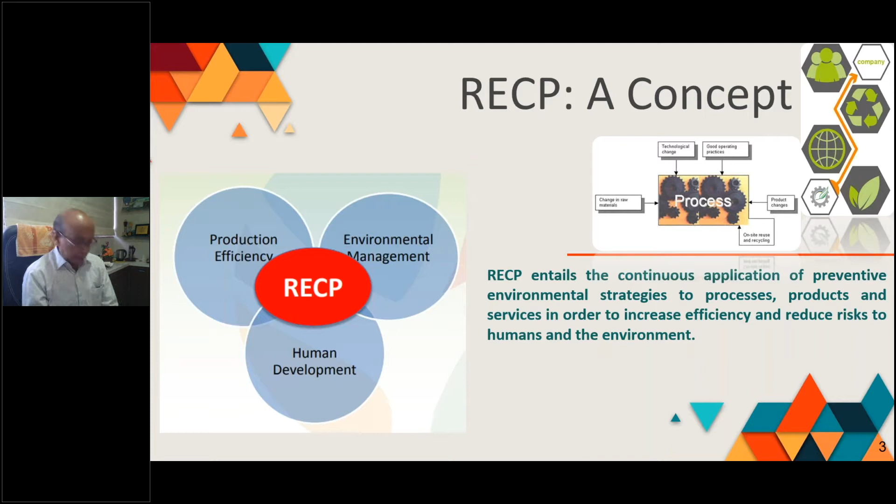So therefore, RECP, I would say, on one hand increases productivity. It's a part of environment management. Ultimately the idea is to reduce risk to humans and the environment. Therefore, we are also addressing the human development concept.

Just to give you a small background about this concept: it emerged long back in 1972, where the first international conference on environment was held. With that concern on environment-related issues, many countries started a new Ministry of Environment. That was in 1972, though our Water Act came in 1974, followed by the Environment Protection Act in 1986.

But again in 1987, at the global level, there was a report known as the Brundtland Report, which provided the concept of sustainable development. So I understand the first terminology of sustainable development emerged in 1987, where we already had the Water Act 1974 and EP Act 1986, followed by UNEP starting an initiative of cleaner production, realizing that a lot of solutions had already been implemented on end-of-pipe. Why can't we do something before the pipe? That is cleaner production.

And then the Rio Summit in 1992 with Agenda 21 also set goals of sustainable development, where we are a partner and signatory, followed by the UN Sustainable 17 goals, which we have committed to achieve by 2030. Then in 1994, UNIDO and UNEP together initiated the establishment of what we call National Cleaner Production Centers. They identified many countries where there is potential for waste minimization or cleaner production. Initially, in 1994, more than 20 such national cleaner production centers were established.

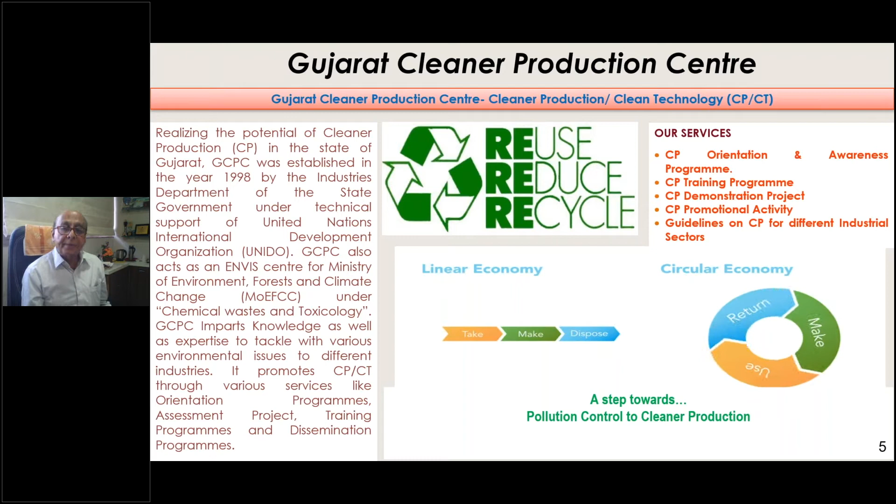That is how we in Gujarat started long back in 1998, and as of date we have a separate entity under the Industries Department of the state government. The idea, as I told you, is that on one side it is economic, that is production efficiency. We have to optimize the use of natural resources, and that is why we call it resource efficiency.

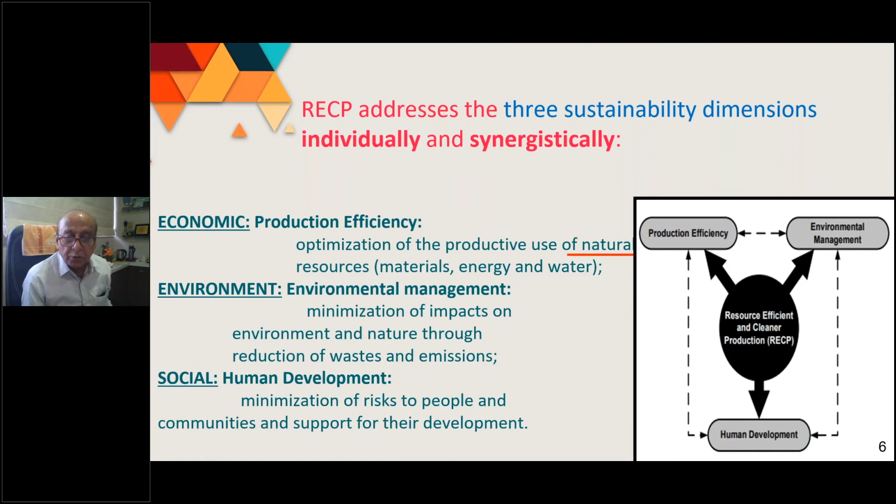That includes material, energy, and water, followed by environment management, because the idea is to minimize the impact on environment due to pollution, through reduction of waste and emissions. And as I told you, ultimately it is social, because we are also committed to achieve UN sustainable 17 goals for human development. So with this philosophy of production efficiency, environment management, and human development, we believe that RECP addresses all of it.

If you talk of tools, what we are practicing as per the structured tools defined by UNIDO is good housekeeping, for example. It is the simplest tool where you find low-hanging fruits, followed by input material changes. In good housekeeping you look for leakages, spillages, and losses in handling of raw material and product, followed by the input material changes.

We are trying to see how best we can use non-toxic raw material instead of toxic material. For example, in dyes, we are trying for natural dyes instead of synthetic dyes.

Process control is very important in MSME, and that is somehow missing. So we are optimizing the process, which is one of the important tools, and going for equipment modifications, because what I observed while working in more than 500 MSMEs in Gujarat is that the equipment they were using is very old and needs modification to become more efficient.

We also talk of technology change, like introduction of green chemistry in some processes, and the type of catalyst used. If we cannot have new or green technologies, we think about how best we can develop techniques for upgradation of existing technology. We also explore the possibility of on-site reuse and recycling, creation of byproducts, and if required, we suggest product modification.

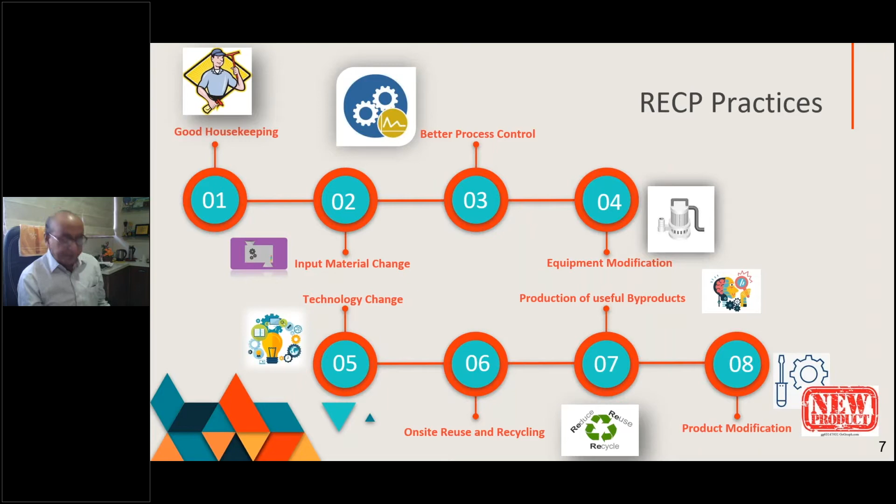If you talk of methodology, it is well defined by UNIDO, which we follow. At the first step we have to plan and organize, because most industry's mindset is towards end-of-pipe treatment, particularly in Gujarat, where we have created so many common treatment facilities - more than 30 common effluent treatment plants, 10 common secure landfill sites for hazardous waste disposal, and common multi-effect evaporators, incinerators, and more. So their mindset is that since they're a member of all these facilities, their environment has already been taken care of.

So it is very important that we need management commitment, and then a well-designated CP team - the RECP team - where persons working on the floor, on the process, are members, including the CP assessor from my side, like me or my colleagues.

Then we establish a baseline RECP profile, and walk through the different processes to develop a flow diagram and eco map. In the initial assessment, we find out the major focus areas where there are the most waste streams.

So in RECP, what I suggest and keep telling people is: go and identify the waste, characterize that waste, and then determine the causes and options - why it is there, how it is there, when it is there, what it is.

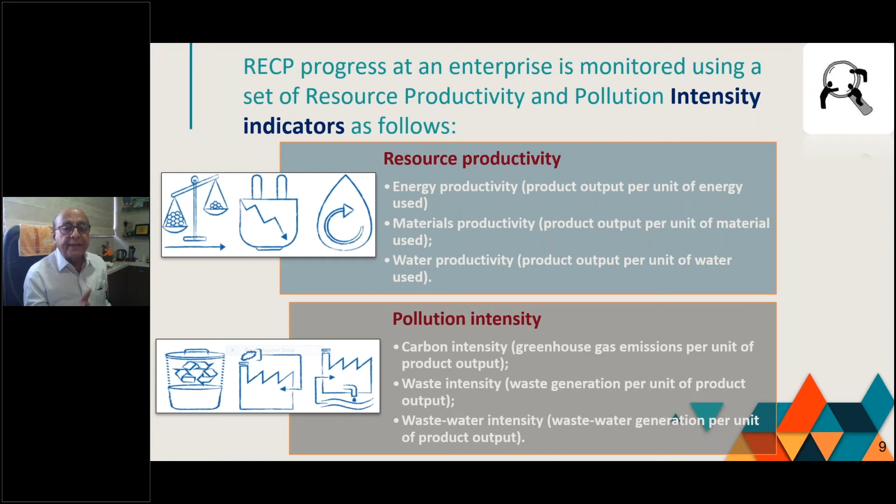So that result tells us that yes, we were able to achieve some reduction out of these 6 parameters. If you talk of benefits, as already discussed, there is an increasing productivity by reducing waste, and therefore an increase in economic benefits. It's very simple, and it is a continuous environmental improvement, so there is improvement in the environmental situation as well. These are the main benefits, and whatever investment we propose, there is a calculated payback period also.

But at the same time, it is not easy. We have been doing this for more than 15 years, but there are so many barriers, like difficulty in getting attitudinal change. There is a willingness to accept this concept that is still tough. We have been working hard to convince that this is a better solution than the end-of-pipe approach, but motivational and attitudinal change is still a sort of question mark, particularly in the MSME sector.

Because from the organization point of view, in an MSME, there are people who take decisions, and those who work on the floor, and there is always some misunderstanding between them. So sometimes, though top management is willing to do it, the people working on the floor are not ready to. There is always resistance to change, and that is the difficulty.

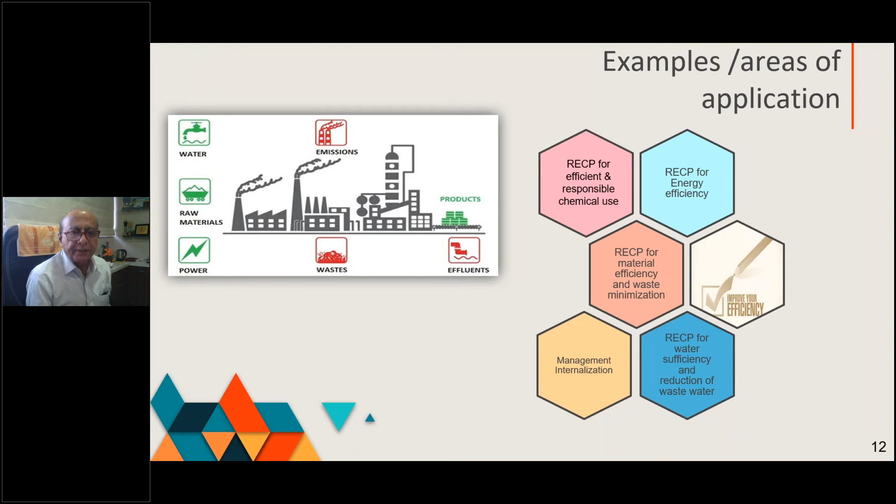Further, there are many examples and areas of application, as I told you, like how we do it with water, raw materials, power, waste, and effluent. With these areas, there are certain case studies within the time given to me. For example, if energy is concerned, I have selected three heads.

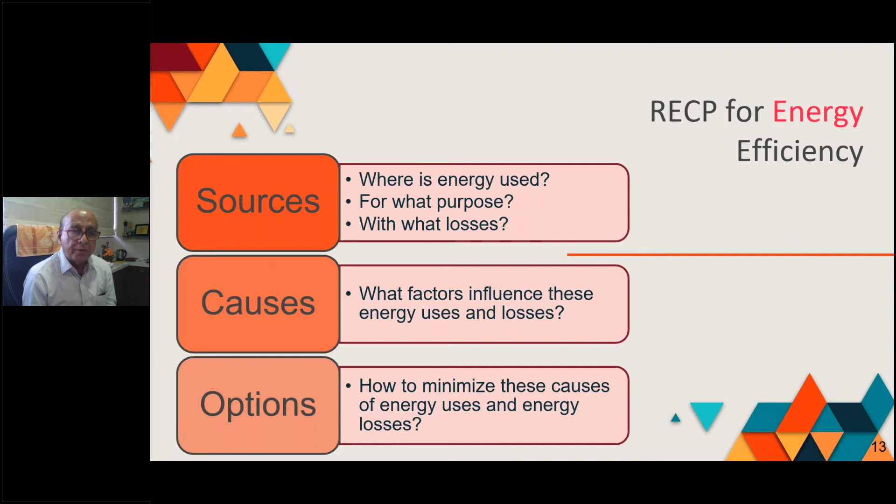What are the sources where energy is used? When we go to an industry, we find out what are the sources where this energy is used, for what purpose, why it is being used, and at the same time what are the losses. Then we go for the causes. Once the sources are identified, we look at what factors influence these energy uses and losses, and then we generate options based on our tools.

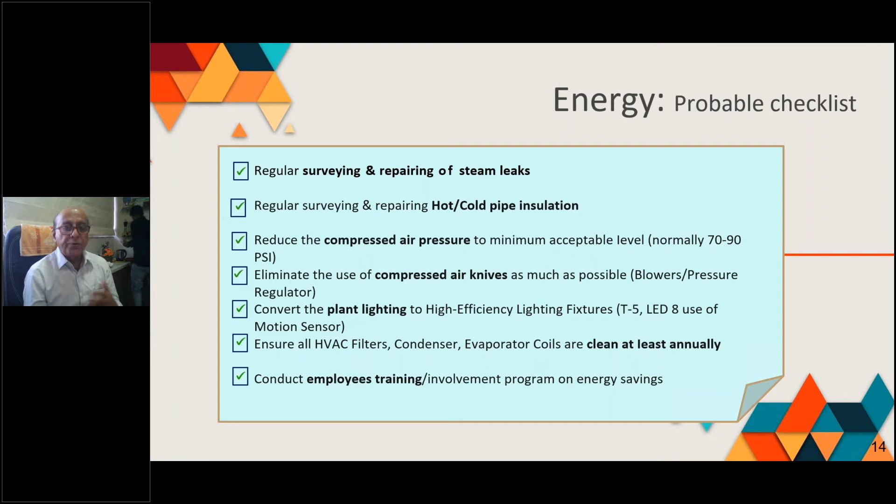And conduct employee training, not only to train them but to make them aware, which is also part of our checklist. I will show you one example. We did thermography in one of our waste paper industries in Vapi, and through that we found that there was almost 18% energy loss just because of poor insulation.

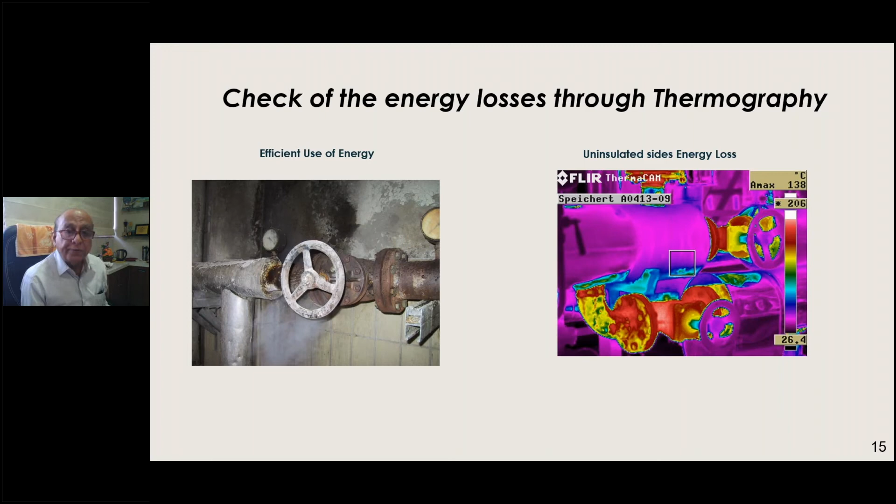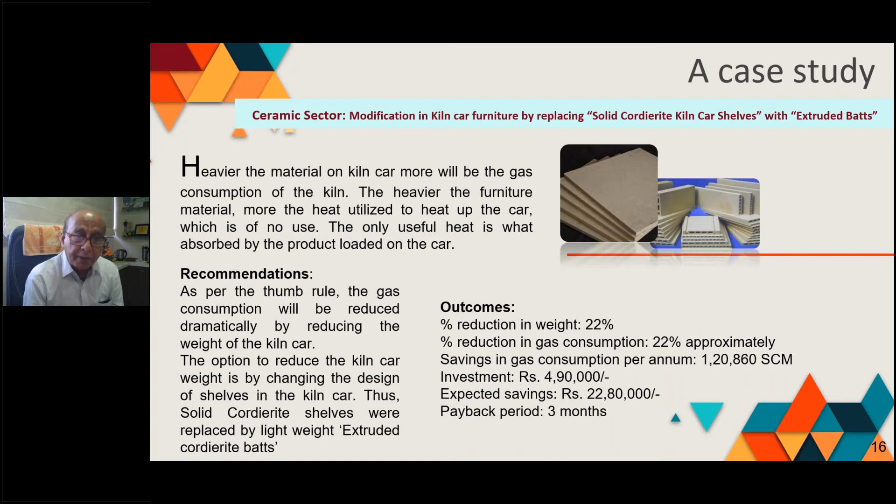This is another case study from a ceramic industry where the kiln was modified, because as you know, the heavier the kiln and furniture, the more gas consumption there will be. It's very simple and common sense. So the conventional kiln was changed to extruded batts, which are lighter in weight, so the consumption of gas was also reduced, resulting in almost a reduction by just reducing the weight by 22%. With whatever investment they made, the calculated payback period was only 3 months. Very simple.

Another example is adjusting the RPM of a reaction pump. There was an industry using a pump and motor for a 30-meter head with a discharge of 920 meter cube per hour capacity, and consumption of electricity was observed at 78 kilowatt hour.

We realized that the RPM of that pump was 1300 plus, so we optimized it by reducing the RPM and kept taking trials. We found that at an RPM of 1000, it was most optimized, which did not hamper the rate of reaction and mass transfer rate. So we optimized the RPM from 1300 to 1000, which reduced energy consumption with no investment.

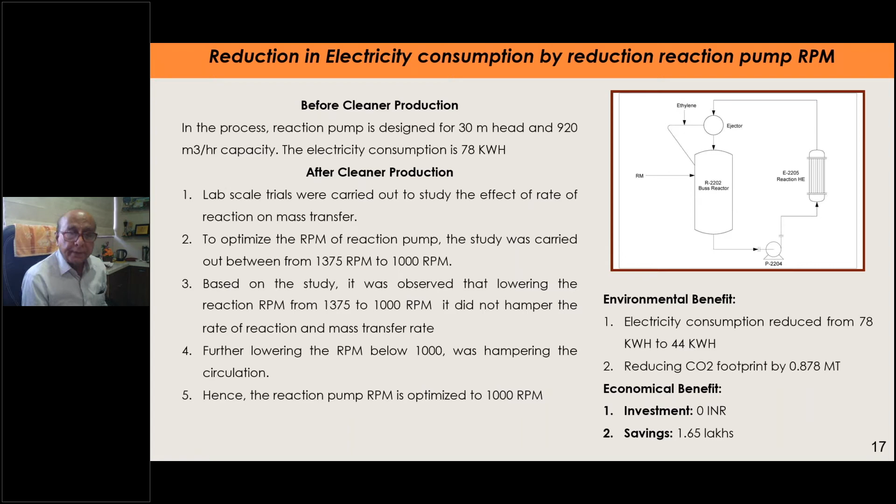The saving was almost more than 1.5 lakhs per year. So this is how simply we modified things.

Another example is chemical use, since in Gujarat we have many MSMEs involved in intermediates of dyes, pharma, agro and specialty chemicals. So from a sources point of view, we find out where chemicals are used, for what purposes, what is their fate on product or conversion, and how they generate waste. Then we look at the causes, what factors influence the use and fate of these chemicals, and generate options to minimize the waste generated through chemical use.

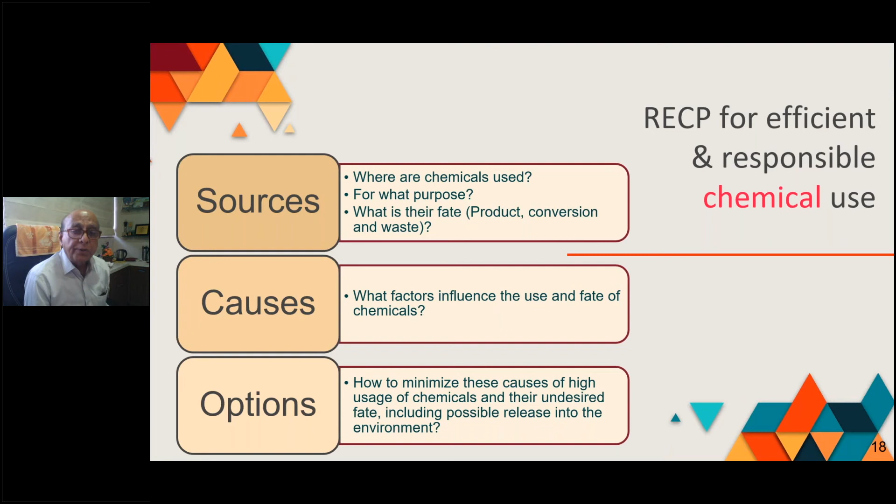This is the checklist for chemical use. We prepare a list of raw materials and auxiliaries used in the process of an industry, their functions, and the quantities used. Then we assign the cost of the raw materials and auxiliaries, and determine what hazardous waste is generated and the characteristics of that hazardous waste.

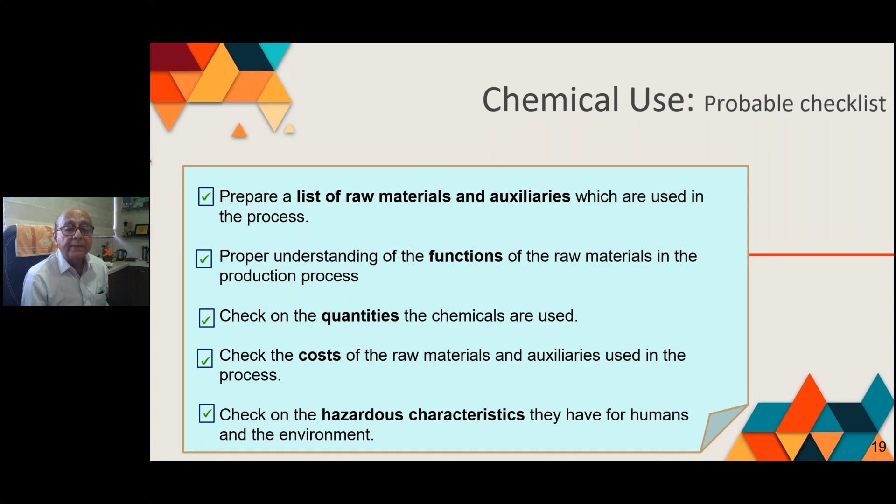For example, one case study. Sorry, some slides are missing here. In the agrochemical sector, there was an intermediate for agro.

They were using carbon tetrachloride to mix with acrylonitrile (ACN), with the help of cupric chloride as catalyst and DEA-HCl as a buffer solution. A solvent results in forming tetrachlorobutyronitrile (TBN), and upon acid hydrolysis, they were getting the final product CMAC.

We checked the quantity of acrylonitrile (ACN), and realized that based on stoichiometry, they were not using the optimized quantity but more than required. Therefore we were able to reduce the amount of ACN through trials, and optimized it, which caused a significant cost benefit.

I think the slide I gave yesterday was not complete, because the outcome was that the cost is reduced with no investment, and this reduction in cost resulted in savings of almost more than 5 lakhs per annum for that industry.

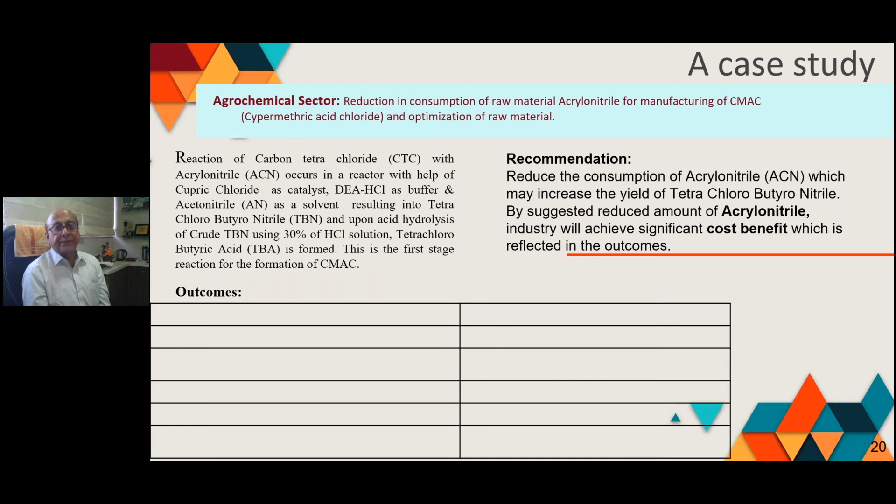Another area is material efficiency and waste minimization. Again, from the sources point of view: where it is used, for what purpose, what are the losses, what are the causes, and what could be the options.

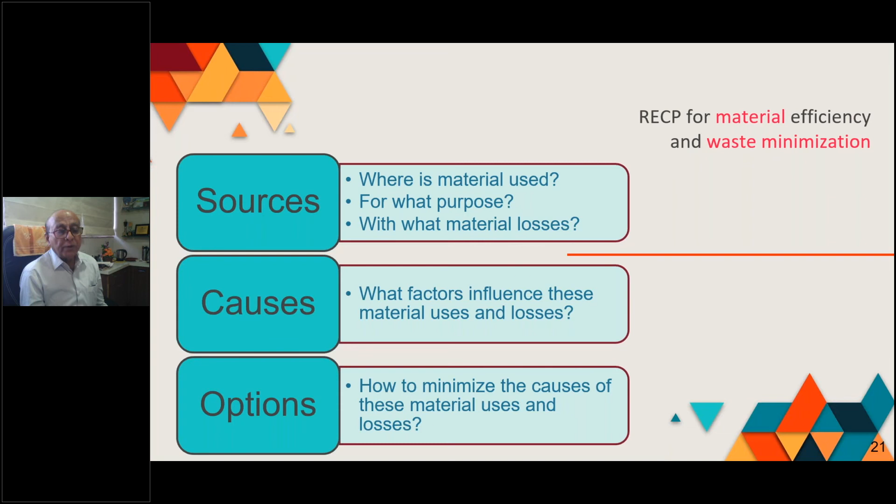The checklist again covers waste streams. We identify waste streams and categorize them as hazardous and non-hazardous, look at the details of input materials used to generate waste streams and their quantity, and check the efficiency of the process, which is very important in any MSME.

We have found the efficiency of the process results in a production yield of hardly 70 or 75%. Does that mean almost 25 to 30% is going as waste, which could be unreacted mass or a byproduct?

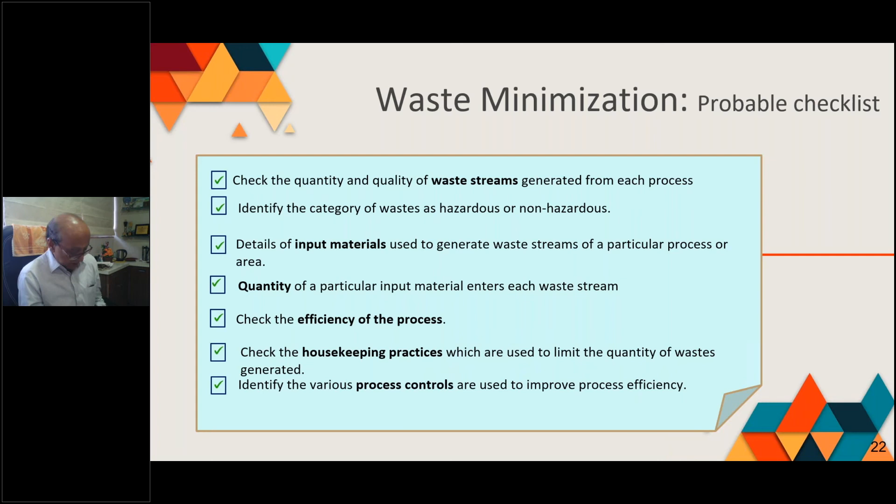With this process control, there are a number of case studies we have generated, which are available on my website. Very recently, one of the chemical industries, by checking the process reaction against the real stoichiometry, we were able to reduce the quantity of catalyst itself.

There was no proper mole-to-mole reaction, which we could achieve by comparing the stoichiometry of that process with the real consumption of that catalyst.

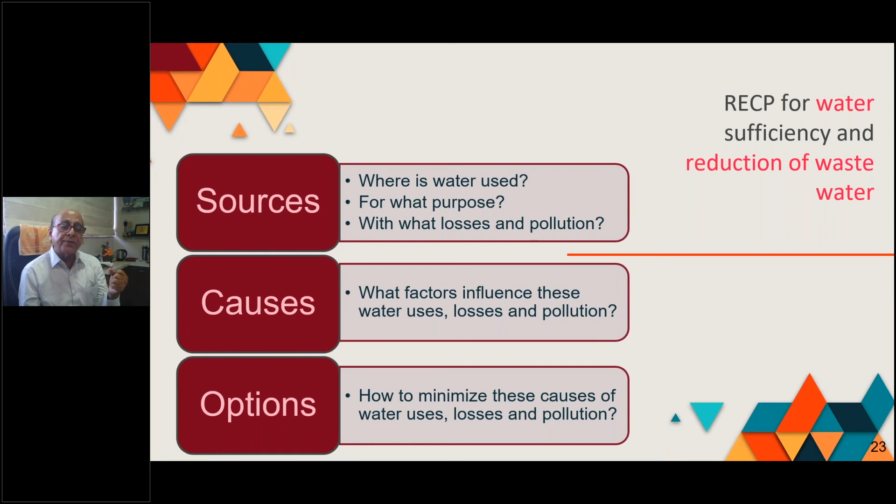Another factor is water and reduction of wastewater. Where water is used, for what purposes, what are the losses and pollution problems, and the causes for these water losses and pollution, so we can generate options to minimize them, because the idea in RECP is to go for resource efficiency while also minimizing waste.

One case study: this is the checklist where we go for a regular program of surveying and repairing water leaks, and design of pump seals, which is also missing in MSMEs.

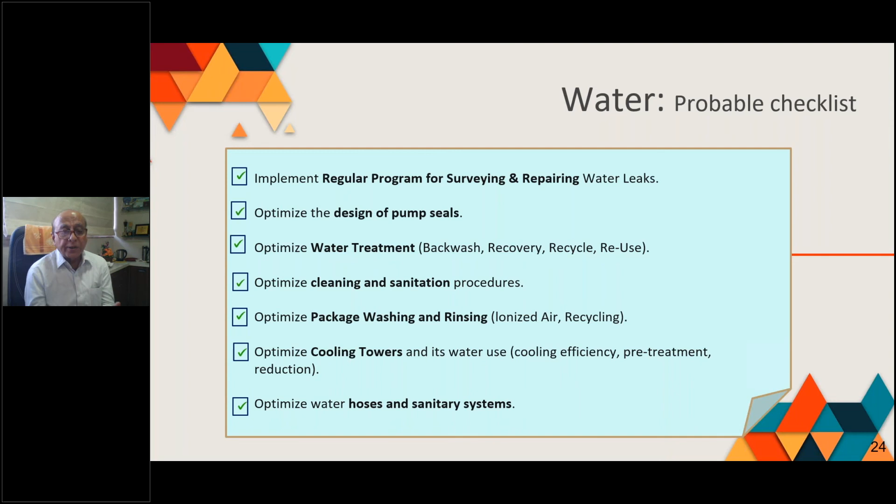We also optimize their water treatment plant, because many food process or pharma industries need a very high quality of water, so they have a small water treatment setup. We also optimize cleaning and sanitizing procedures, packaging, washing and rinsing, which is also very important. We also go for optimization of their cooling towers, which is very common in MSME, and optimize the water hoses in their sanitary system. So these are the checklists we use while going for the water analysis.

A case study again in one of our ceramic industries, where there is a grinding ball mill. They put all ingredients like raw material, water and riverbed stones, and then there is wet grinding. The water added is filtered through a 40 mesh size. Earlier, that filtered water used to be sent to drain, and then we realized we can store it instead of draining it. Since it is a wet grinding ball mill, the same water can be used again, which ultimately reduces their fresh water demand.

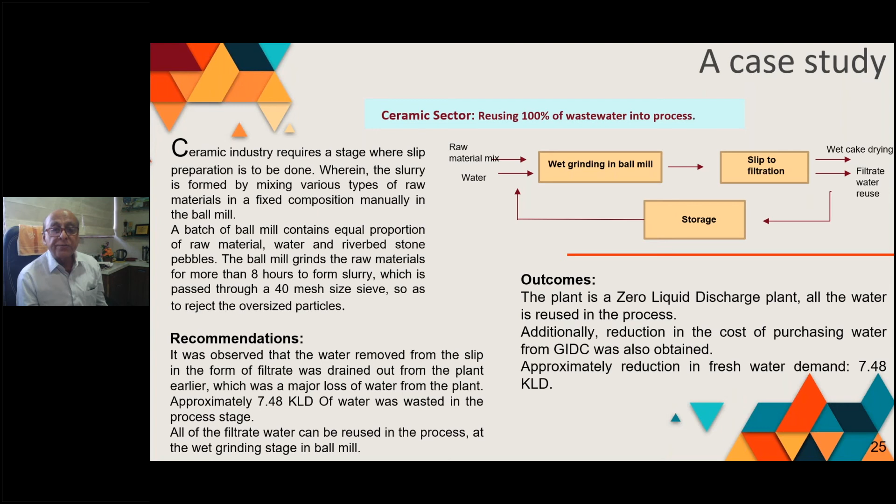We were able to save on water charges, which is very important, and we could reduce their fresh water demand by approximately 7.48 KLD, kiloliter per day, just by recycling that filtered water. So this is what led to the management internalizing this approach.

It is a very well planned and structured methodology, so we have to plan good RECP options and monitor it. With the benchmarking, I have shown you the 6 parameters we compare and check, and then the management sometimes agrees to it, or sometimes there is resistance or apprehension, which we try to overcome.

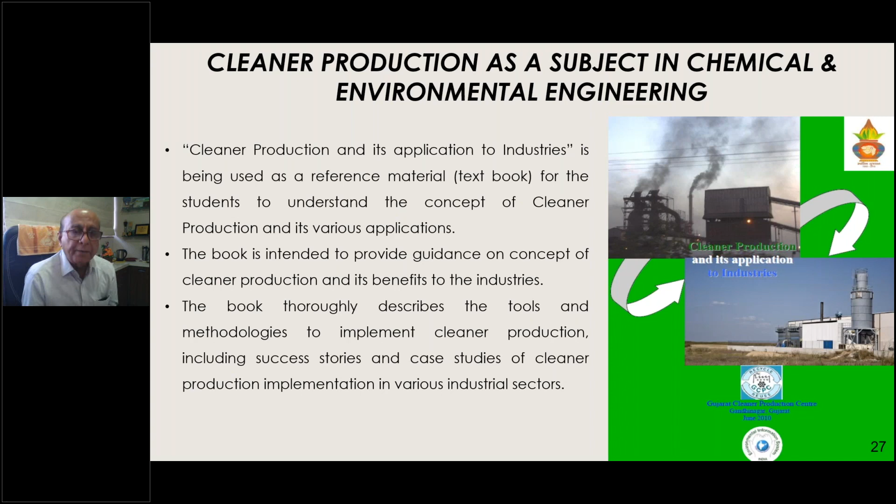A few slides regarding the realizing of cleaner production. Fortunately, in Gujarat, a subject on cleaner production has been introduced at the graduation level of engineering, and incidentally, the book which we have compiled with the theory, concept, methodology and tools, and many success stories, is being used by those students as reference material.

This is one important gap I felt while working on RECP: industries are doing it themselves, many academic institutions are just bothered about finishing their course and conducting exams, and the facilitator or government is simply watching. So I started interlinking these three major stakeholders, where we invite abstracts from graduate, postgraduate and research scholars to work on research and development useful for industry.

So we invite abstracts from students, and many times I also take real problems from industries and assign them as projects to students, since I'm associated with a number of academic institutions. We find many times very good work on research and development from the students.

Fortunately, there is political will to go more and more for RECP. For the first time in our country, Gujarat state has instituted a cleaner production award, given to the industry that has done the best exemplary work implementing RECP, resulting in reduction in water consumption, wastewater, solid waste, energy consumption, and emissions. This award has been given by the state government every year since 2005-2006, when the Honorable Prime Minister was here as chief minister.

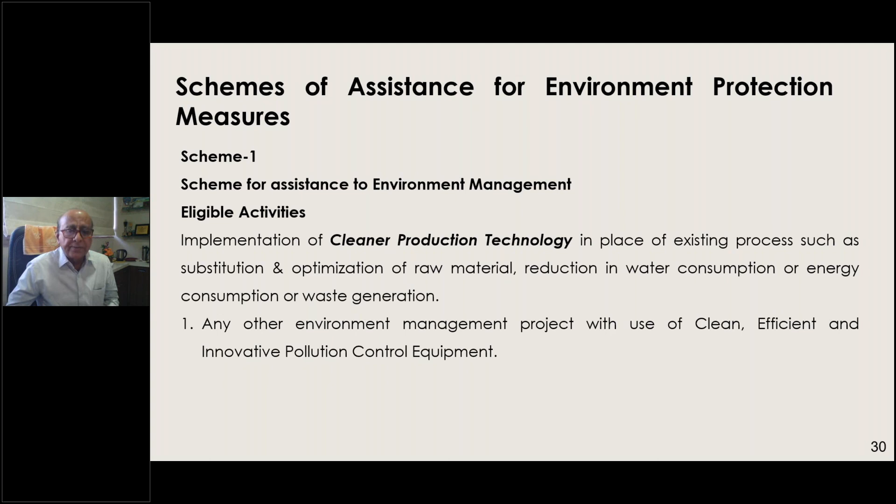Also, as I told you, we realized there are economic barriers too—industries do not have small funds to implement these measures. So there is a scheme for assistance for environmental protection measures in our Industrial Policy 2020, where if an industry has implemented a cleaner production or RECP concept that reduced water, material, wastewater or energy consumption, 35% of the total expenditure, with a cap of rupees 35 lakhs, is reimbursed by the government. So we have a subject, a policy for the CP award, and also a policy for financial assistance.

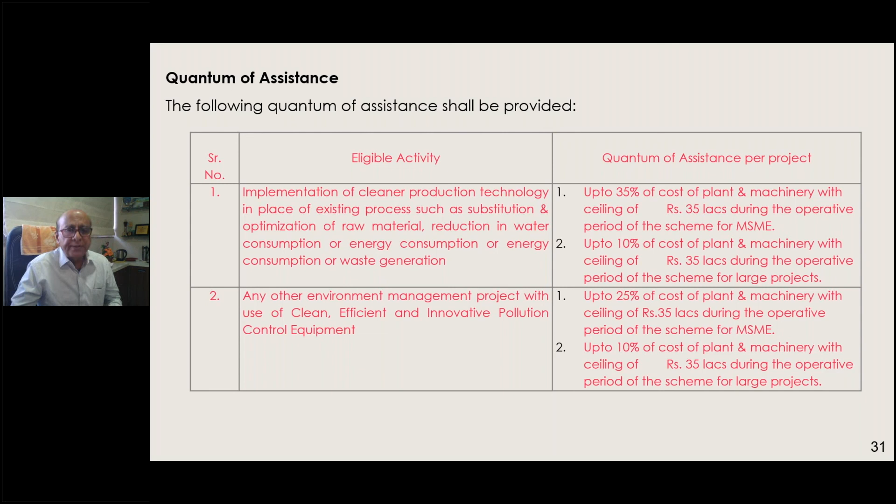With all these efforts, we are able to generate some success stories. Again, thanks to WRI and my colleague Ashok, who gave me this opportunity to share our views. We are also working on retrofitting our existing industrial estate into an eco-industrial park, with more and more RECP at the unit level.

We also go for upgradation of common infrastructure like roads, water supply, drainage, common effluent treatment plants, or common treatment storage disposal facilities for solid waste. We are also working on industrial symbiosis—how the waste of one industry can best be used as raw material or a resource for another industry.